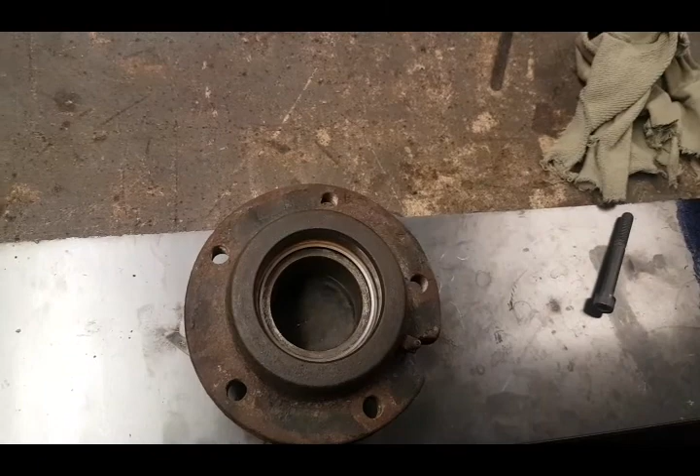What we got here today is this wheel hub off a forklift truck. And what we've got to do is we need to do a little repair to it. We got a bearing race here that needs to be pressed into this end, and there'd be no problem. Right, it's got a little bit of wear in there.

Very difficult there. It's not a huge amount of wear, but you should just be able to see there's a little bit of a lip where this has probably spun in there, I would imagine, and it's worn it away. It might not have actually. It looks quite clear, the bore. But so that's what we need to do. We need to build up this inside bore here, and then we'll machine it back out.

We've also got a bearing to press in this side. This side's all right. It looks like they've had a little bit of trouble getting it out, I would imagine, if you look at that. But that's not going to affect it, because the contact surface is actually down in there.

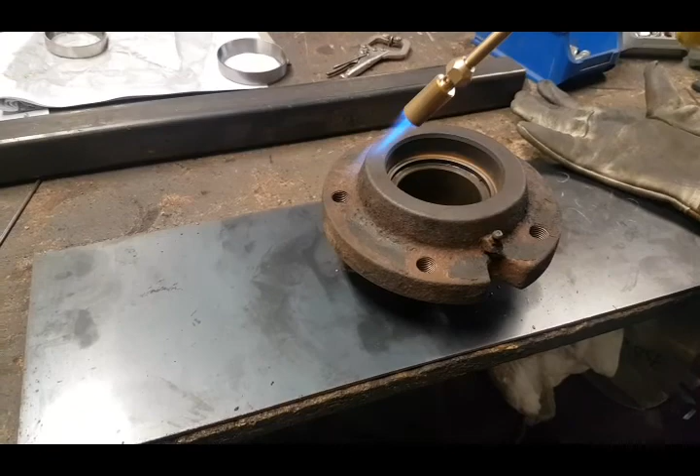Okay, so all we're going to be using here is MAPP gas, which is, to be honest, I think a form of acetylene mix, but it's considerably safer than having bottles of acetylene here, and it's a lot hotter than propane and those sort of plumbing gases. It is a plumbing gas. I find it a lot better than propane, and you can use it at any angle. You can use it upside down or whatever.

But we're just going to get enough heat into this, so we're not going to shock it when we start welding. Basically, I just need to warm up around where I'm going to be welding. I don't need the entire part to be smoking hot. It's just to get a bit of heat into it.

Alright, this is going to take a while, and I need two hands to do it. So I'll bring you back in a minute when we're getting a bit closer.

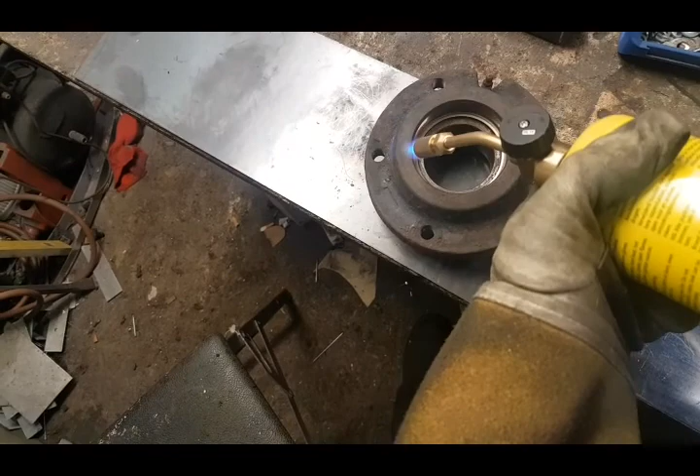Okay, so I've been doing this now probably about four or five minutes, and it's probably just about hot enough that I can hold it with my welding gloves on for a short time. So we'll get it earthed up now, and we'll get some build up on that bore.

I'm not going to film the welding because I haven't quite mastered the arc shot yet, so it would be pointless. But I'll bring you back now when it's filled up, and we'll take it over to the lathe. Well, no, first thing we've got to do is check out what our tolerance is. So we're going to go on to the manufacturer's website, and we're going to check what tolerance they're calling out for a press fit.

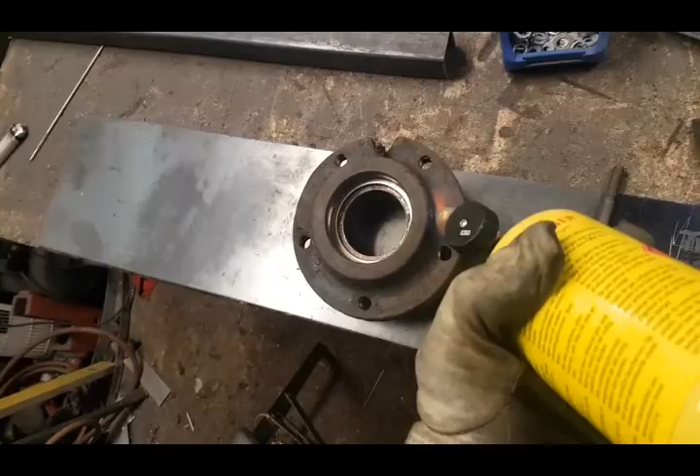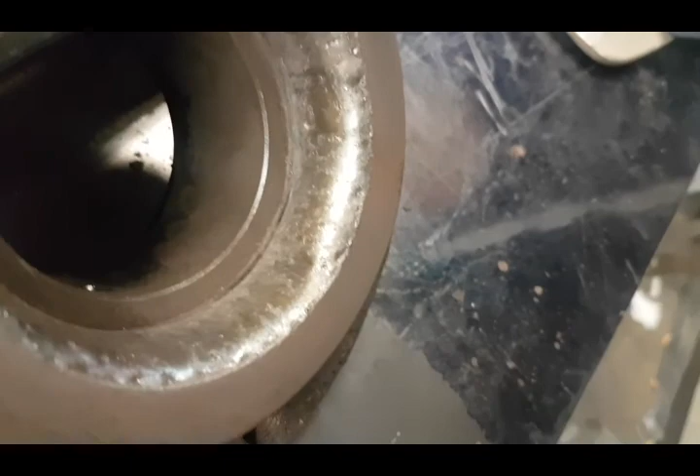Okay, so we've just finished welding up the inside there, and I put considerably more than what I probably needed in there. Let's see if you can see. So I've gone right into that back wall there, come right at the edge. It's still extremely hot at the moment. It looks like it's taken pretty well.

I'm not too concerned about these little edges on the outside there, because there's a chamfer there, so I'm not worried about that. But like I said, we'll wrap this up now, and we'll let it cool for a bit, and then we'll come back and we'll get it up in the lathe and see what we need to do. Okay, right, I'll see you back in a minute.

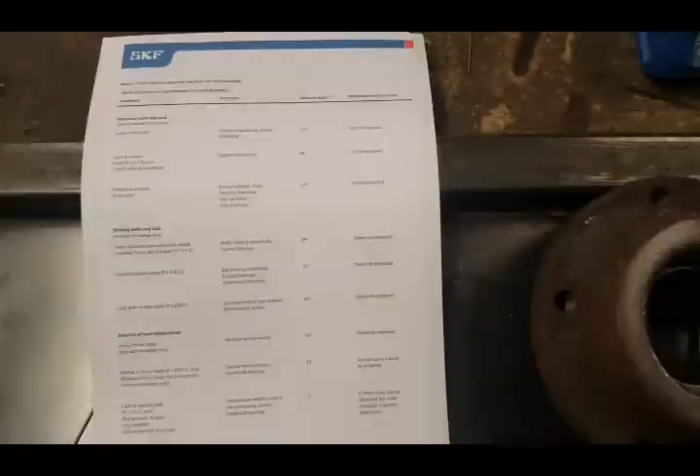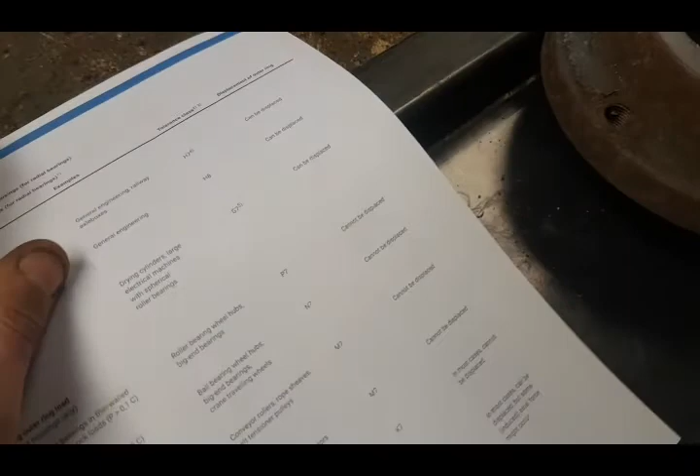Okay, so while we were waiting for our part to cool, we've just unwrapped it, and it's warm. It's not quite ready yet. You know, I can touch it, but I would imagine it's probably around 50 or 60 degrees.

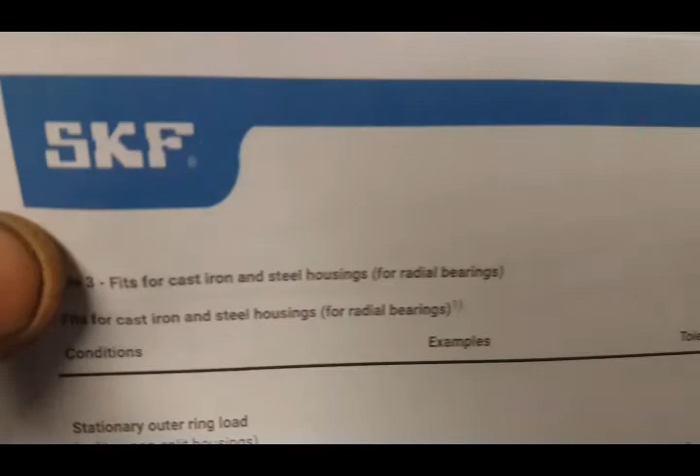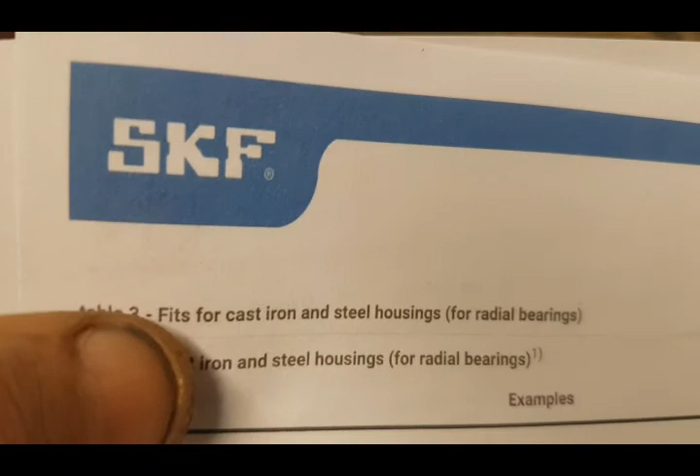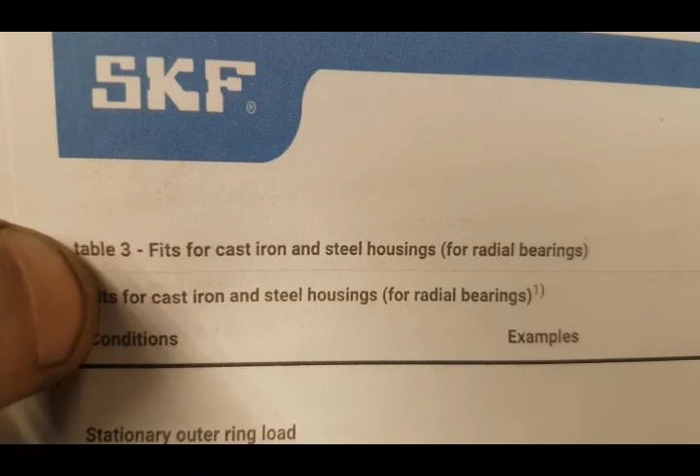But what we've done is we've gone on to SKF's website. They're not SKF bearings, but they're a standard bearing, and we've looked down through the literature, and this is all free to download. It's a good source of information if you're dealing with bearings. And we're looking for the fits for cast iron and steel housings, because obviously we've got a cast iron housing.

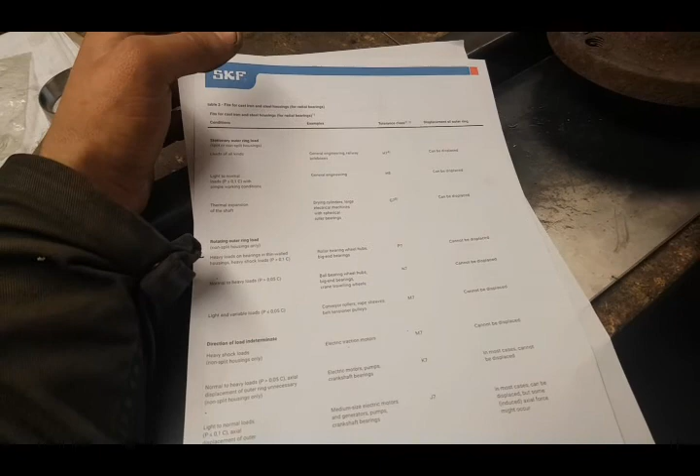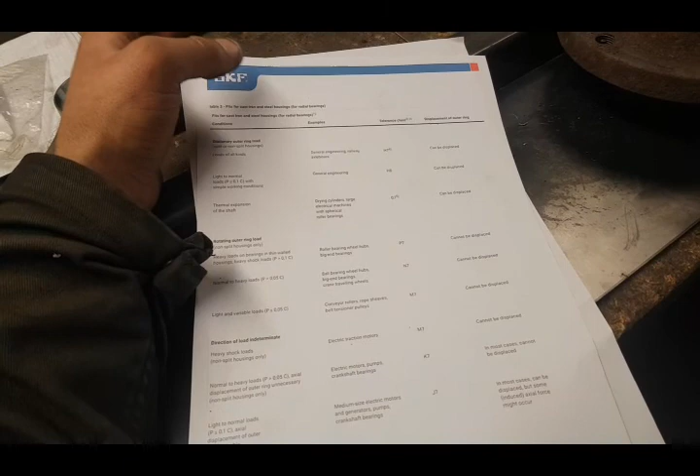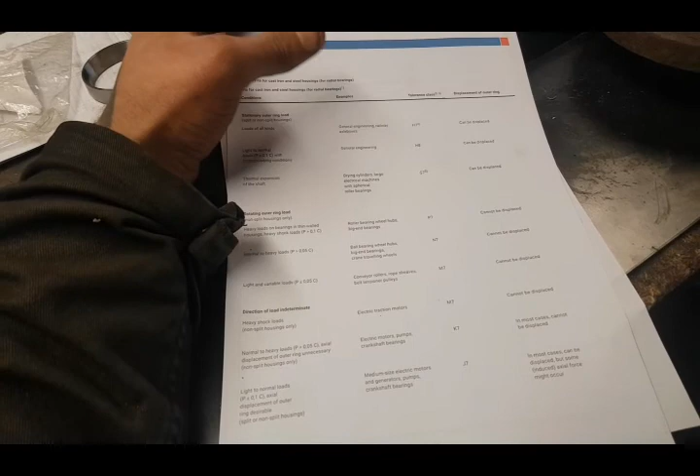Now we know it's a press fit, so we could, by experience, have a stab at what our fit is going to be. But the thing with bearings is, if you're a little bit tight on your press fit, not so much with these because they're tapered, so the amount of torque you put on drawing the bearings into the race has an effect on the amount of pressure on there. But certainly with other types of bearings, just plain roller bearings, if you're a little bit under on your tolerance, you can get tight bearings and they'll wear prematurely.

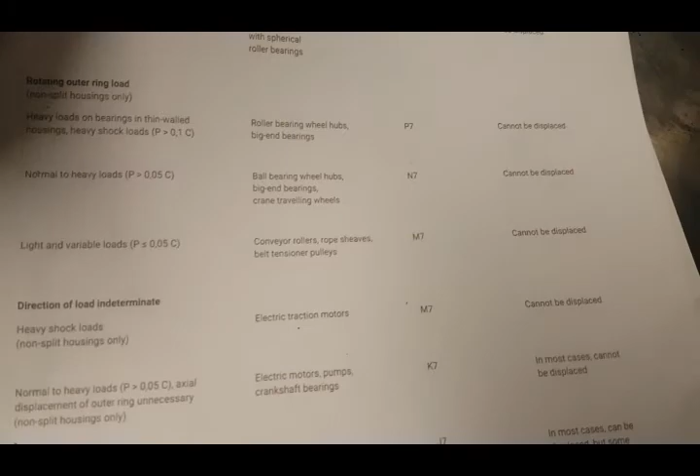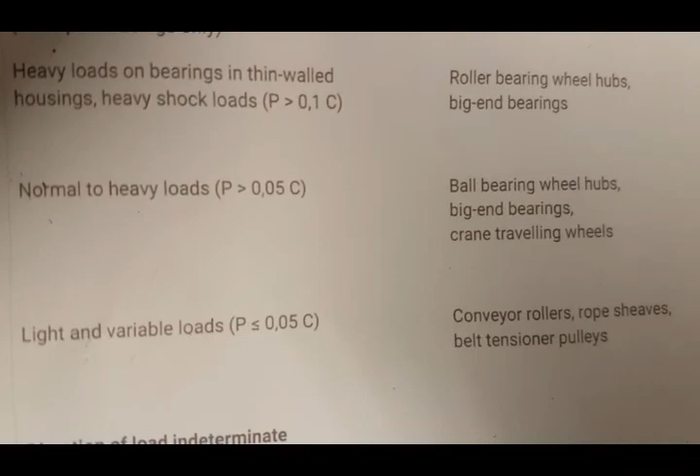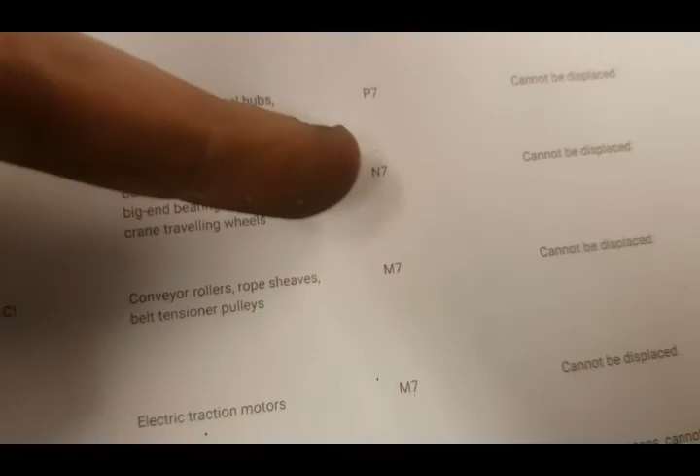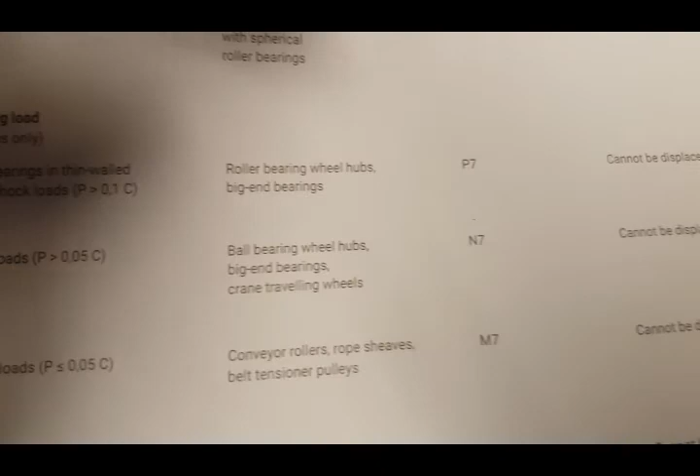So what we're looking for here, it tells you your different sorts of bearings here, right? And we're looking at this one here, heavy load on bearings in thin walled housings, which is pretty much as close as we've got to what we're doing. And we've got normal to heavy loads here, but it's with a ball bearing. But we're looking at this one here, which is a roller bearing wheel hub, and it's telling us that it's a P7 fit.

Now, I could go through the Machinery's Handbook and check what a P7 is, but there is a handy little app that I will attempt to...

There's a handy little app. God, I'm in a mess here. I'm not particularly prepared for this, am I?

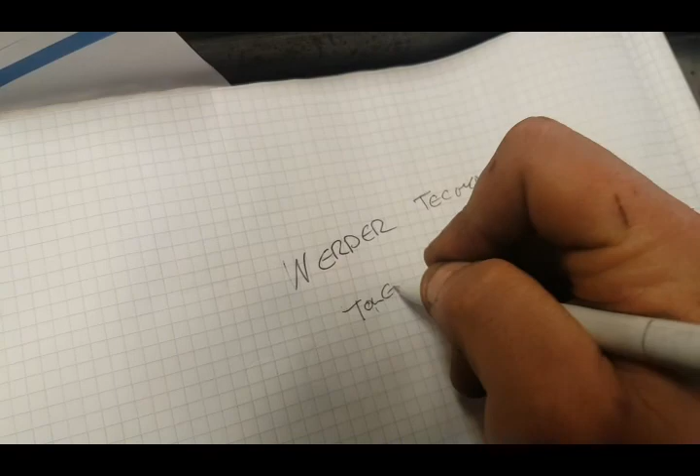Right. There's a handy app by Werder Technik, I think, a German company, and it's free on Android. And if you go into there, there is a section called tolerances, and this is all info. I can't show you, but I'll pop a screenshot up now.

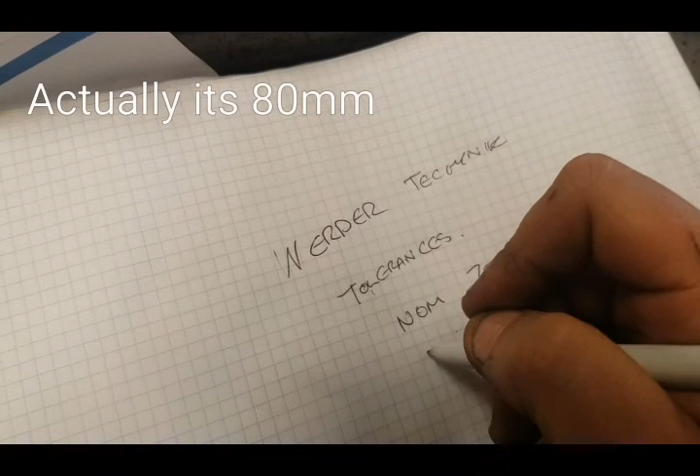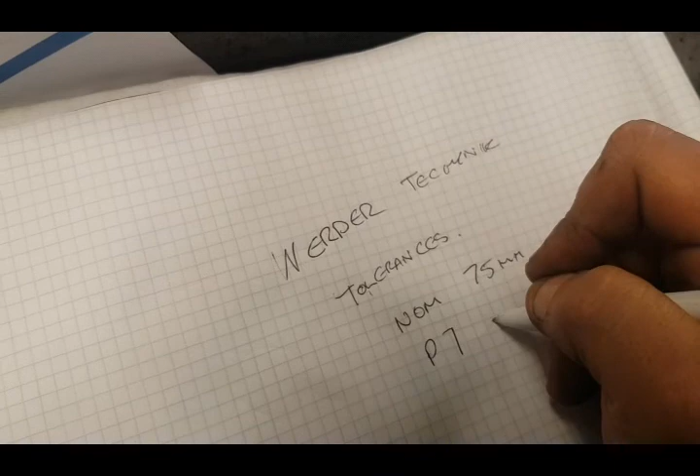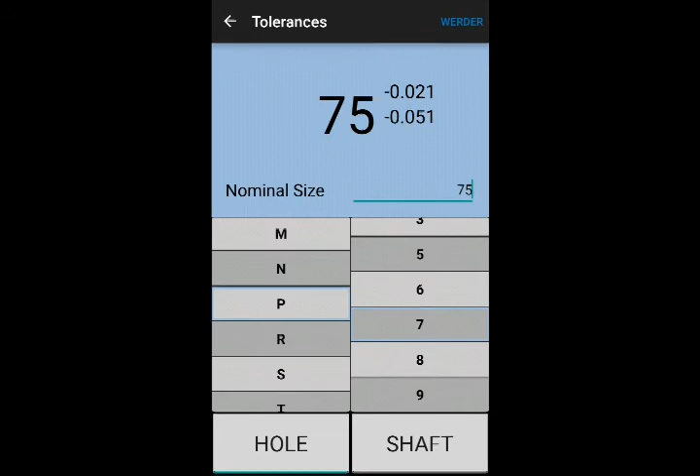And basically you put in your nominal size, which for us is 80mm, and then there's a drop down menu, and there'll be letters in the one column, so we pick P, and there'll be numbers in the other column, and it'll be a 7, and it tells us that tolerance is minus 0.021 to minus 0.05-something, right?

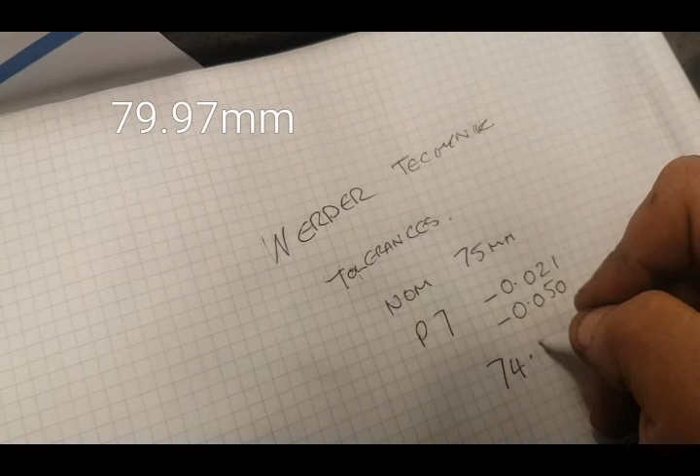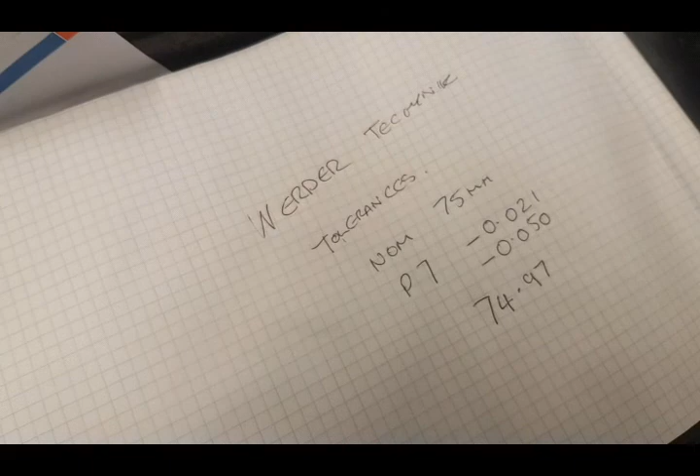So the size that we're going to be shooting for is going to be, say, 79.97, around there. Okay, so once this is cool enough, we'll get it up in the machine, we'll get it indicated, and we'll see how close we can get to that tolerance. Okay, so our part is now cooled down, and we're going to get him set up and dialed in.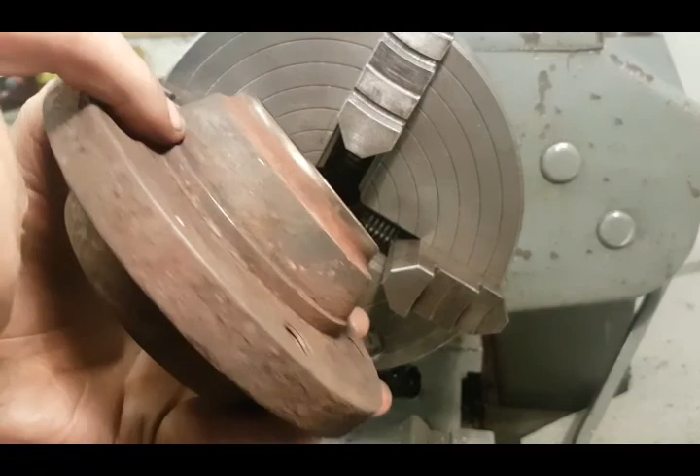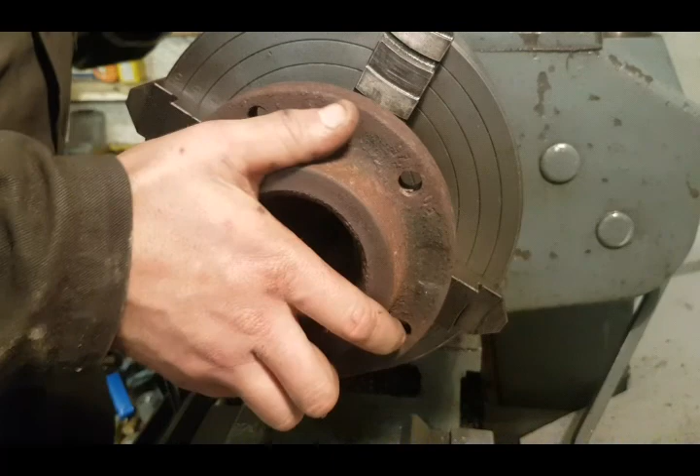I was hoping to hold it on this outside edge. Unfortunately, it's just a little bit too far out for our jaws. So what we've got is this little ridge in here that we're going to grab onto. Okay, so we'll open our jaws out a little bit. Tighten up. Okay.

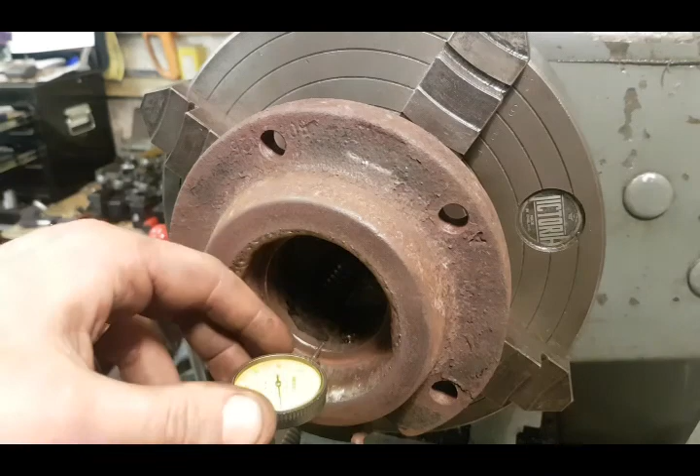Now, first thing we're going to do is indicate onto this bore. I don't know whether you're going to be able to see it, but we'll do our best. Put that there. There we go. Okay. Hang on, let me just move you a little bit. Might be a little bit difficult to see. As you can see, we're miles outside the range of the indicator at the moment. There's our high spot.

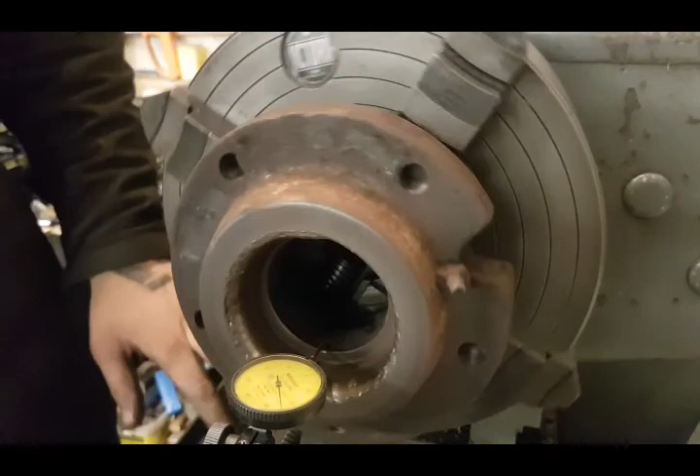Okay, so we've got that. Just move our indicator a little bit because we're just outside the... okay, now we're within range. A little bit of a bumpy bore, but... oh dear. Oh, look, we've lost it now.

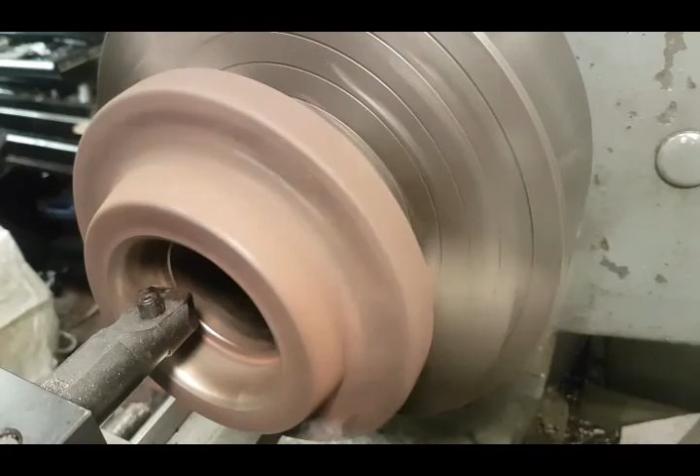Okay, so that's about 400 RPM. All we'll do is go in and just find the back of this. Actually, I can do it off the face. Come off the back face, zero up there, and I'm going to come back 5, 3, 0. Now we'll take a pass, and we've got a fair amount of material to come off, so we'll give it a good go. Okay. Here we go.

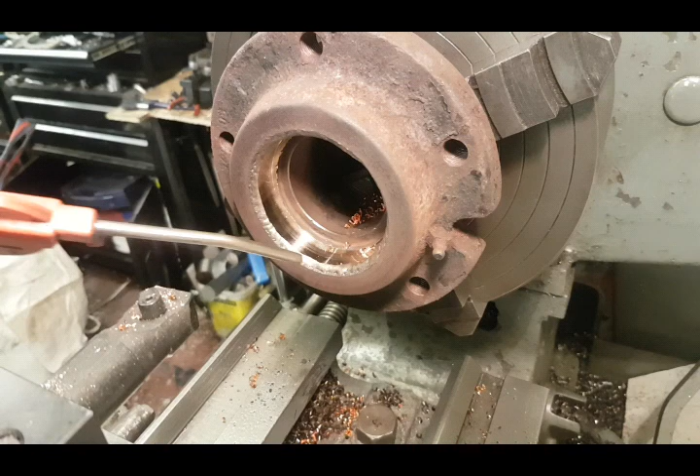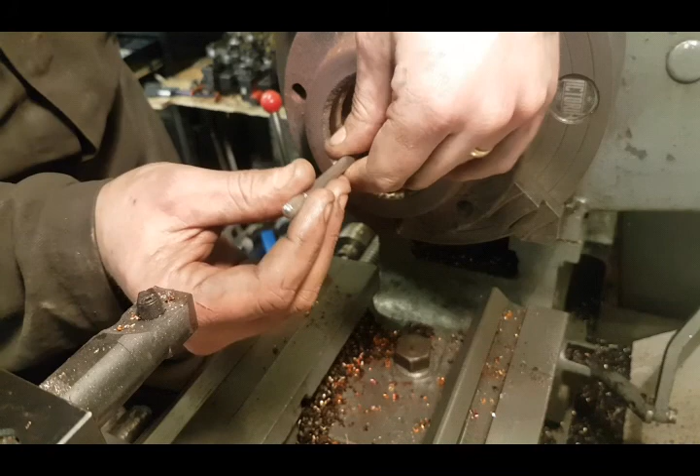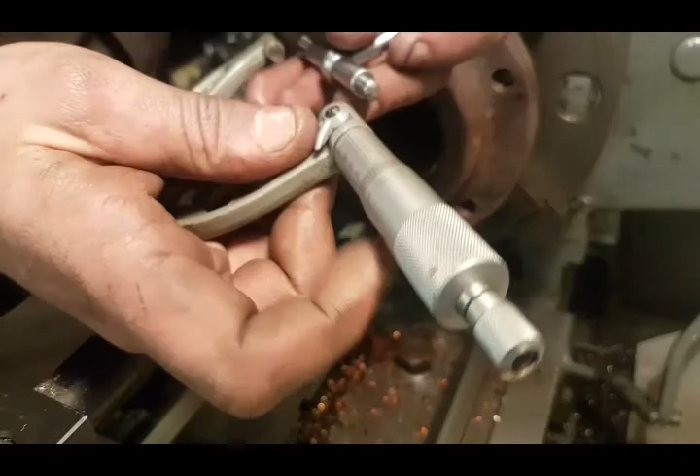Should have enough there. Okay, so I did tell you a little fib earlier. Our bearing is 80 mil. So we are aiming for 79.997-ish. Open up. Oh, for God's sake. This one. Can you see that? Yeah. Okay, so we're at 76.15. Set that readout.

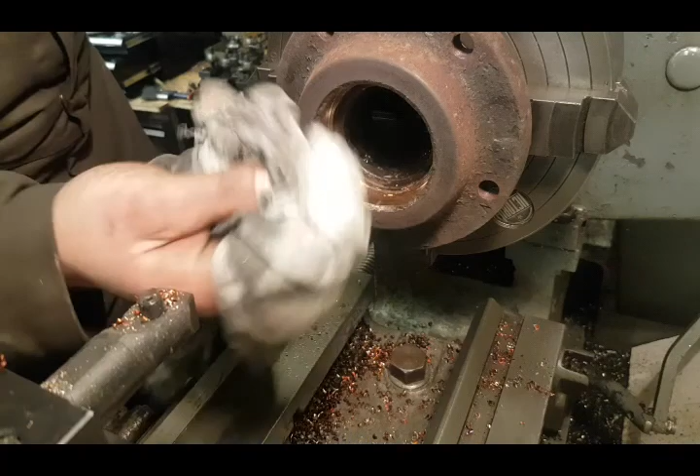Take a few more passes. Here we go. Let's go to 78. Hopefully we've got enough material in it. So we should be reading 78. Okay, 78.03 on the mic, and my readout is saying 78.04. Another pass at it. Okay, they're close enough anyway. Right, now we'll go to 79.

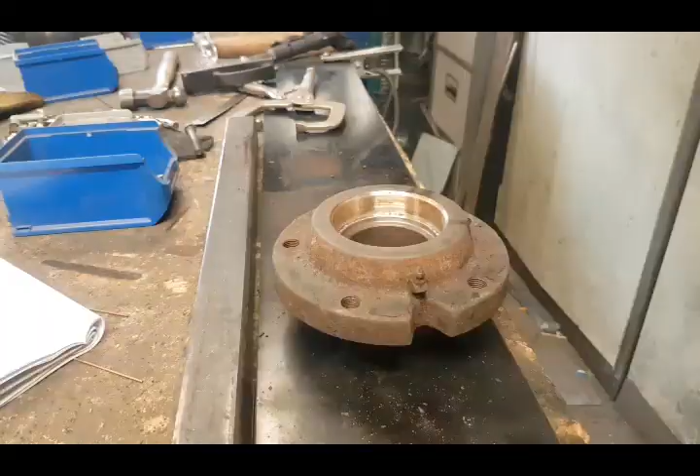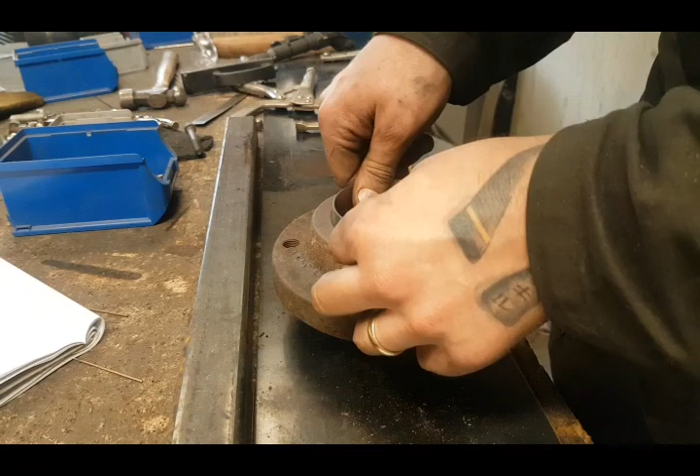Okay, so we're gonna make the machine safe now, and we're gonna get this bearing race pressed in. Okay, so I'm back over on the bench now, and just for a sanity check, we got our bearing, and it's not dropping in, it's not falling in there. You can feel it just starting to bite on the chamfer there, but it needs a press, so that's good. We'll take it over on a press now, and we'll pop him in there.

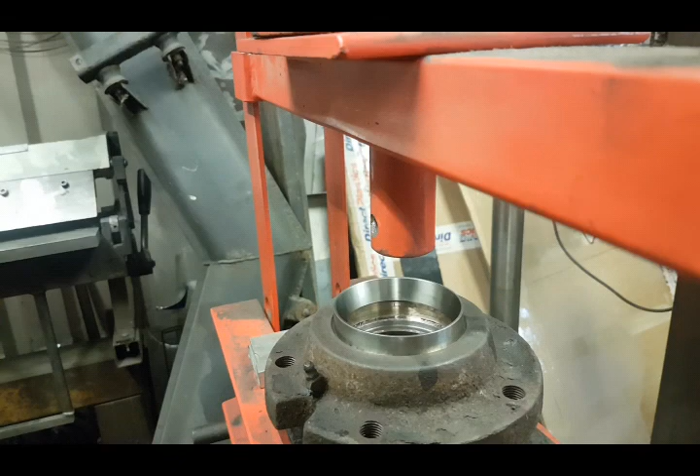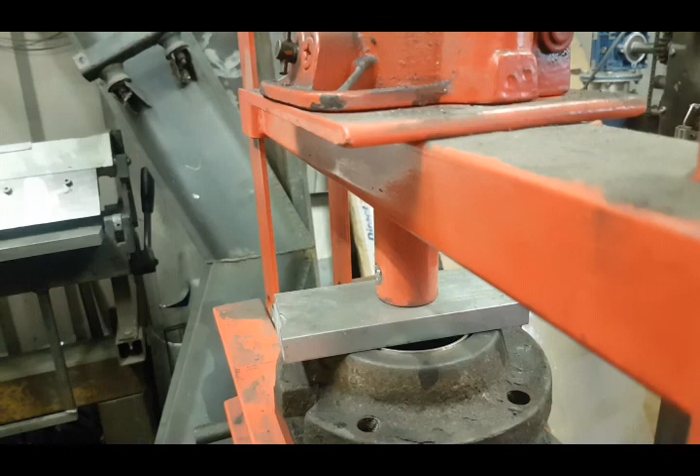Okay, so we got it seated pretty squarely. We got a little block of aluminium here to plonk on top of it. We are lined up there. Okay, you're not going to be able to see a great deal, but we'll have a look now. Right. Okay, what we need to do is we need to get a piece now to push out the last little bit. Okay, and that's home.

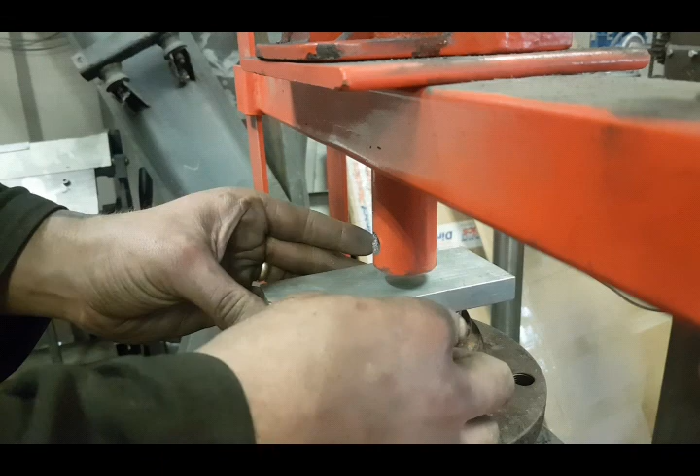Okay. So we've run out of time. So that's about the end of this little job. We've managed to save somebody's fork truck, at least for the time being. I would imagine it was considerably cheaper than buying a new hub.